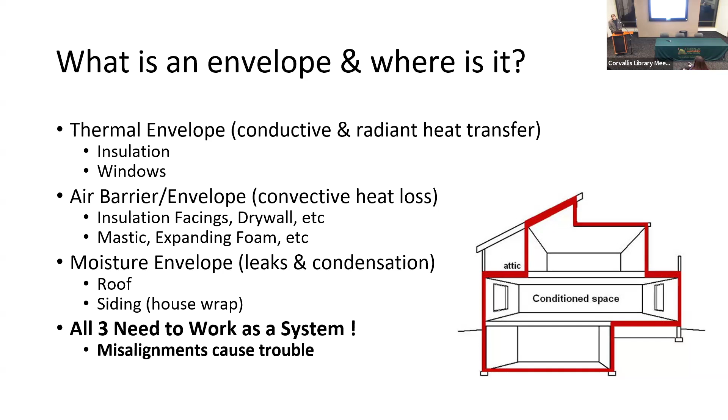Okay, so when we're talking about thermal envelope, we've got attic insulation, wall insulation, underfloor insulation, you've got your windows, and the one that people tend to forget about, your duct system. Your heat ducts are this little extension of your thermal envelope that goes in unpleasant places usually, and has particularly high susceptibility to have problems.

When we're looking at what's good and what's bad, key things you want to think about are what the R value is. This is really what kind of material do you have to separate you from the outside and how thick is it? That'll tell you its thermal conductivity to separate the heat inside from the outside. But you also have to think about, is it aligned with your air barrier? We can talk more about that.

If you walk around with a loose knit wool sweater and it's windy outside, it doesn't really matter what the R value is because the wind blows right through it. And your house is just the same. So you need to make sure you've got an air barrier, which is basically a windbreaker, and some insulation, like a sweater. And then you've got to think about bypasses. These are just the places that get missed, the holes. They're all over your house. Go with a nice barrier, and then don't get overrun by all sorts of crazy things that plumbers and electricians do.

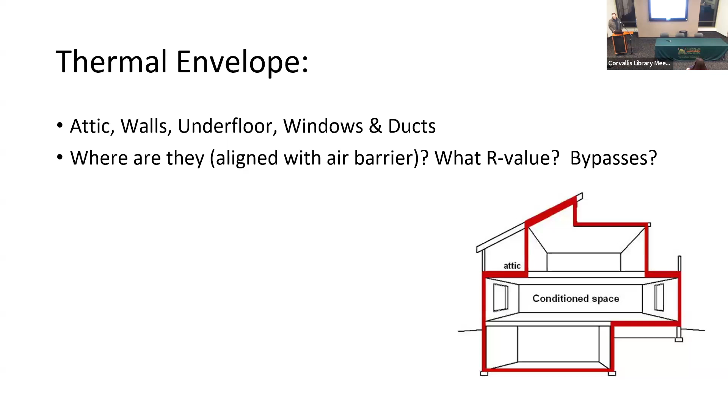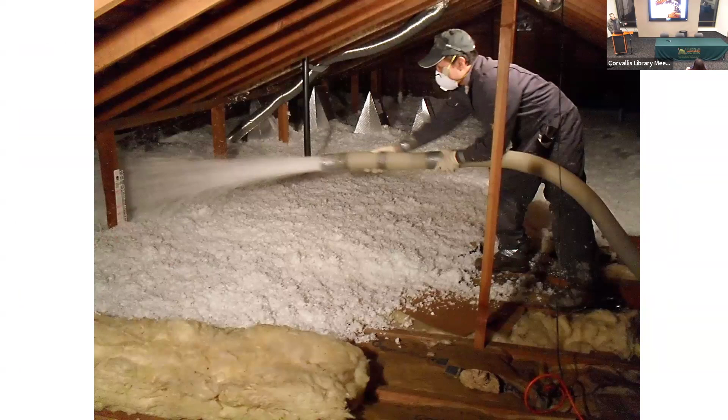Solution: blow in a bunch more insulation. It's not actually that simple. There's a bunch of prep work that needs to be done first. But when we're thinking about the thermal envelope, really, we're just trying to get lots of insulation and get it really thick. So when it's all said and done, it should look something like this.

Okay, then you've got wall insulation. If your house is built before the mid-70s, there's a reasonable chance that you don't have any. And if you do, it's probably pretty lousy, especially in Corvallis. Corvallis was one of the last places in the country to get wall insulation and one of the most resistant. There was apparently some very influential professor nearby who was sure that wall insulation would rot your house out. Turns out he was wrong. So wall insulation is a very nice thing to do.

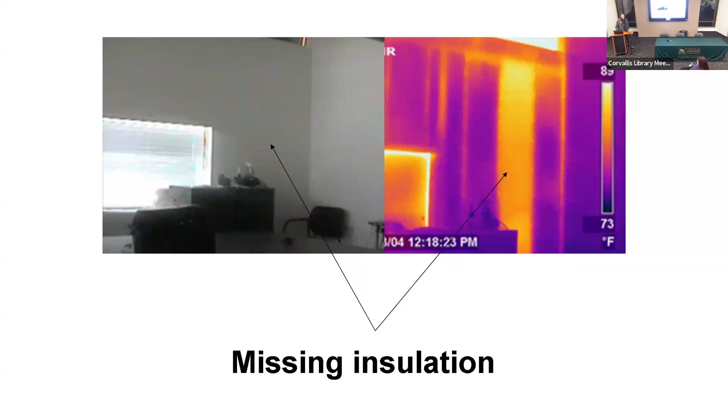Yeah. So the library does have the infrared camera that you can borrow. And so I brought one home and I found out on the top rim up there, that was before they put the insulation on the top plate, and you can see the color difference all the way around. It's pretty cool that they'll loan you an infrared camera. Prices have come down, but the first one that our company bought was $50,000. So, I doubt it's that level of quality. Yeah, well, it was a while ago and it wasn't that great of a camera. They just used to be really expensive.

Yeah, we've also heard you can get attachments for your smartphone that are like a lens. Yes, I have seen those and they are surprisingly decent. They're not fantastic, but they're not bad. You know, if you're interested, those exist.

Okay, if you have no wall insulation or if you have particularly lousy wall insulation, there are things you can do about it. This is the easy way. We pop off some of the siding, drill a hole through the subsiding, pack it full of dry fiberglass, and you'll end up with better insulation than most new homes.

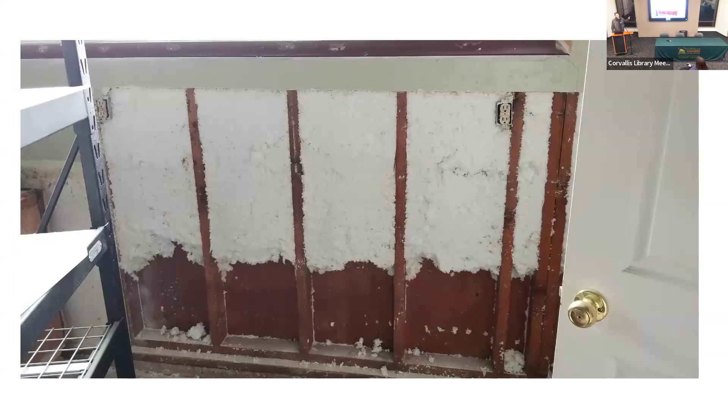So does it settle down over time? Not if you do it right. You want to see a picture of that? Okay, that is a house that we had insulated probably 20 years ago. They had a flood, like a washer flood. So the disaster restoration guys came in. You can see right here, they cut the bottom 4 feet of the sheetrock off. They dug the wet insulation out of the bottom. This is dense packed blown fiberglass.

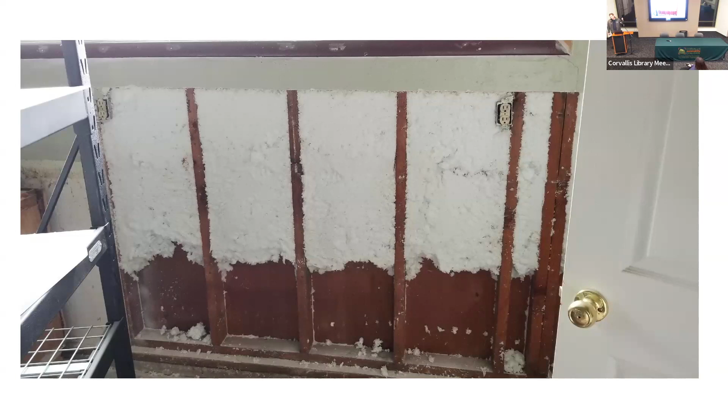There's nothing holding that in. There's no binder, there's nothing. It's just packed so tightly that it stays put. I had a similar thing on my own house. When I moved in, Total Comfort had insulated the walls maybe 5 or 6 years before. I had hideous paneling in my dining room. I took it off, and because I work all the time, it took me about 2 weeks to get sheetrock back up. At that point, I had 2 dogs and a toddler. The insulation was just fine. It packs in very, very tightly.

Actually, when we fill the walls, they usually start at the top and fill down to the bottom, because it'll pack so tightly to the sides that it'll stay put. All that fiberglass is just like little springs that interlock with each other, and they'll get enough tension on the side that it won't go anywhere. But you can dig it out or push through it if you need to, like these guys did. So what's too tight? Because if you pack insulation together too tightly, then it doesn't have the air spaces in between. Very true. Very unlikely to ever get to that point on wall insulation, because the sheetrock or plaster will blow off your walls first.

But that is part of the reason why you do not want to do your own wall insulation. A lot of this stuff is potentially DIY-able. Wall insulation or wall injection is absolutely not. This is a very specific skill set that takes forever to learn. So if you had the insulation blown into your walls more than 25 years ago, would that settle? Depends on what was blown in and how good of a job they did. If it was cellulose, probably. If it was urea formaldehyde foam, probably. If it was fiberglass and they did a good job, should be just fine. If it was quite a few of the different varieties of foam, should be just fine. The only real way to know is either open up some holes or use the infrared camera. Even if it settled some, it's probably not super cost effective to do much about it now, unless you really care. I guess check out the infrared camera from the library.

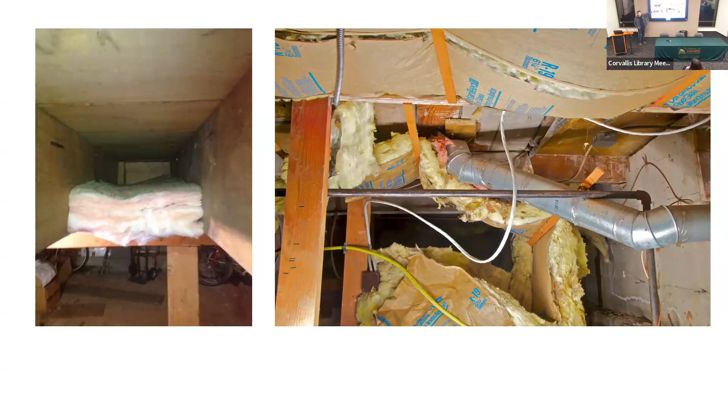Or like this. Here's a great one. Anybody see the problem with this particular install? A little extra airflow in there. A little extra airflow. This is super common. If you have a house built in the early 2000s, chances are your underfloor looks just like this, where the insulation is sitting down, not in contact with the floor. It's doing something, but it's like walking around with your jacket open on a cold day. The air blows right through it. It doesn't do much. You can also have cool stuff like this. All sorts of problems here. Number one, the insulation's in backwards. That paper facing needs to be on the warm side, otherwise you risk condensation. It's falling down all over the place, and I guess they just skipped stuff over there anyway. There's a lot of stuff like that.

This is kind of what you want. So this is an in-progress shot. You want the insulation to be firm, no gaps, kind of like zipping your jacket up. You want it to be even on the bottom and all nice and twined and look pretty. One of the nice things about insulation is if it looks nice and pretty and boring, it's probably doing a good job.

Okay, don't forget about windows. If you have aluminum windows, people make pots and pans out of aluminum because it is so good at moving heat in them. You don't want heat moving through your windows. So please, if you have aluminum ones, let's talk about getting rid of them.

If you have old wood ones, it might be hit or miss, but it is amazing what new windows can do. Square footage wise, most people just don't have a whole lot of square footage of windows in the shell of their house. So it's hard to make huge improvements. But on a per square foot basis, windows are usually terrible and there's lots of room for improvement.

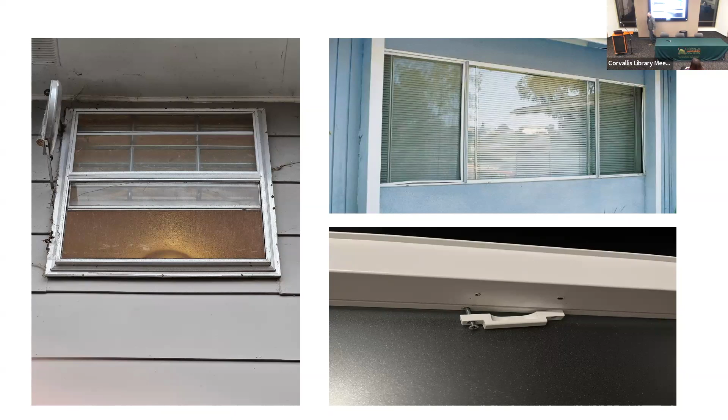Also, if you have stuff like this, so this is a vinyl window. It doesn't close anymore. These people had left their window open for like 10 years because they couldn't close it. That's the kind of stuff that would be really nice to fix if we can.

We could talk about this slide for a very long time, but it looks kind of boring. These are National Fenestration Rating Council stickers. Sounds pretty exciting. Every window that you buy is going to have one of these stickers on it. This will tell you how energy efficient the window is. So the super short version, this number right here that says U factor or U value, that is the same thing as an R value for insulation, but it's inverted because it's cooler that way.

If you want to talk about the math side of that at some point, let's talk later, but smaller U values are better. So the smaller the number, the better. Current code is a 0.27, this is 0.24, so it's a fair bit better than code. Solar heat gain coefficient, this is a super interesting number. This is how much radiant heat moves through. So when the sun is hitting your house, how much that greenhouse factor comes through.

There is not a right or wrong about whether this is a big number or a small number. It's all about what you want. Some people want to have a greenhouse. Some people think they live in Arizona and they want to reflect all the heat out. You can pick what number you want, but probably the biggest advancement in glass for windows for the last maybe 10 years is that it is now reasonably affordable to pick the solar heat gain coefficient you want. It's not just a standard number anymore. So there are lots of flavors of what's called low E that you can choose from.

Yeah. So one thing I learned about the R values, some of the windows, they say 60. That R value isn't 60, it's actually, on double glazed, like 0.6. Isn't that right? Yes, so an R value is the inverse of a U value. So in R values, which is what we usually talk about for fiberglass insulation, they're relatively big numbers and the bigger the better. So current codes are 49 for your attic, 30 under your floor.

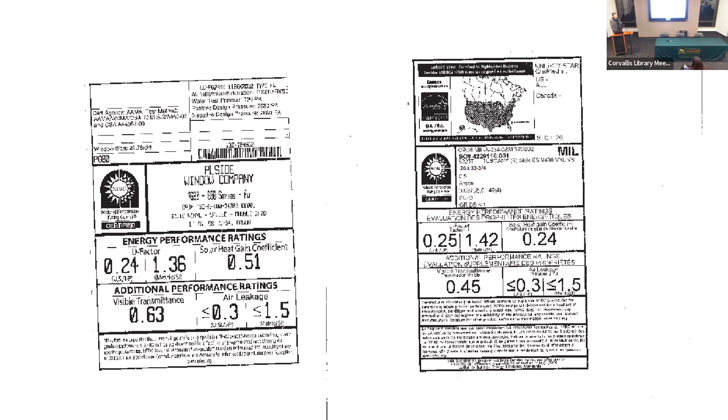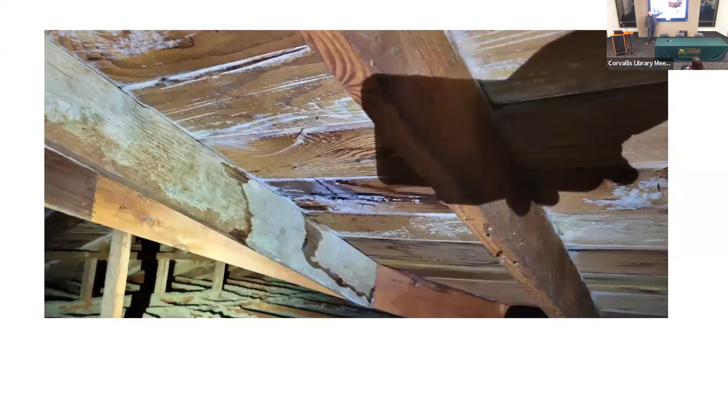Okay, water barrier, super quick version on this: this is the underside of an attic. This is water pouring in. This is mold and fungus and stuff growing. If your roof leaks, it's a problem. You don't need me to tell you this stuff. But if your roof is leaking, please fix it before you do anything else.

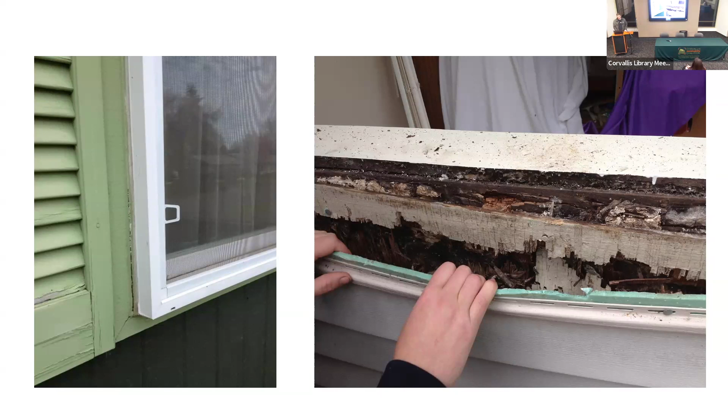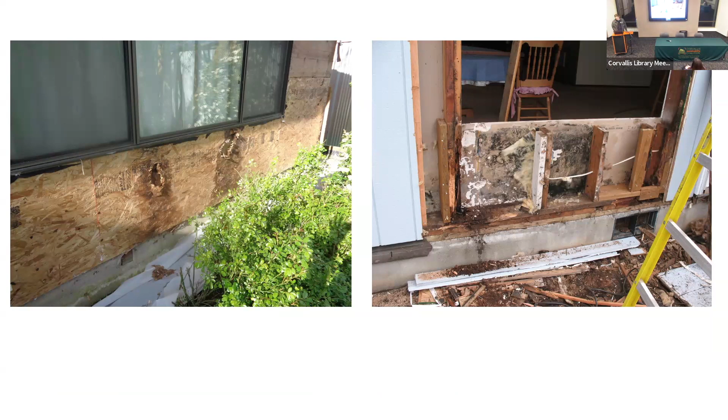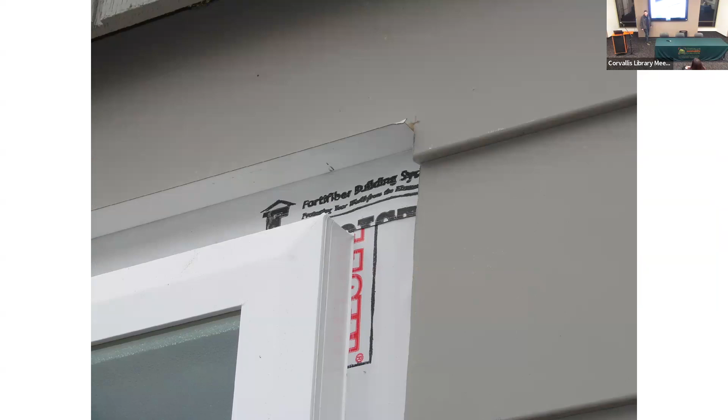Water barriers are important. Otherwise you get stuff that looks like this. So this isn't too bad, but this is all rot. That's rotten fungus and mold and all sorts of gross things that happen from not doing things carefully. The answer to most of the problems, by the way, is this little piece of metal right here that probably cost $2. That's window flashing. It solves a world of problems. So we can talk about all that in quite a bit more detail, but it is very important to keep the water out of your house.

Okay, then you got to think about air movement. So the simple way we did that, we bought a dehumidifier for $125, and it's taken maybe a half a gallon a day of moisture out of the house. We just move it from room to room. It's always picking up moisture, and so anyway, that's a simple thing to do. Yes, dehumidifiers can be extremely helpful. There are plenty of other ways to deal with moisture issues, but that one is pretty much a surefire.

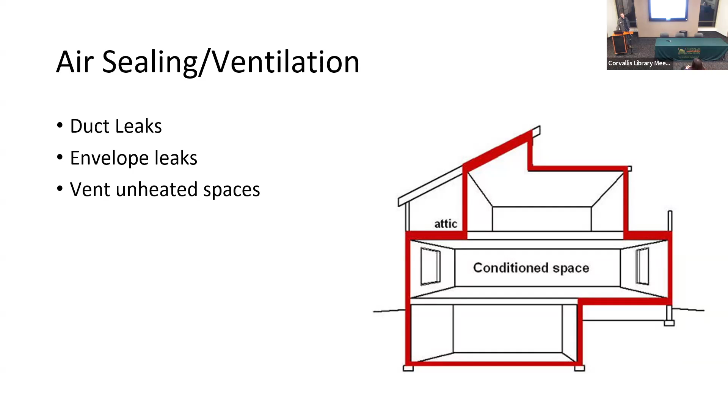Okay, so the other envelope thing that we want to talk about really quickly is the air barrier. Getting back to ducts, this is the one that people tend to forget about. Who wants to tell me why you think that air leaks in your ducts are the most important thing out there? Anybody? Somebody. Somebody else, I mean, go for it, but somebody else got to talk. Can't just do this guy.

Well, the one thing we found out, we were running the heating till we opened up the manhole, and we found out the temperature underneath the house was the same as the temperature inside the house. That is super common. In fact, people's crawl spaces are hotter than the inside of their house when they have duct leaks. Because you're heating the outside. Yeah, if you have a leak in your duct, it's outside your barrier, you're heating the outside. You're not heating or cooling the inside of your house.

Exactly. And your ducts are pressurized. Air doesn't move through a hole if there's no pressure difference. But the whole point of a duct system is to have high pressure differences. It's also usually the hottest air in your house. And so if it blows out on your floor or in your attic, it's just not cool. So people do all sorts of things, super awesome duct repairs like this, leaving giant 1-inch gaps down the length of the duct.

If your house is built after like the mid-80s, you probably don't have metal ductwork. You probably have flexible ductwork, which is made out of like party balloon mylar and garbage bag plastic, and for most people, taped together with some sort of random duct tape-ish stuff. And so things like this happen. You're talking about your house, the same temperature inside and outside. This house, which had this really nice tall crawl space, I think it was 98 degrees in the crawl space. They were heating that and waiting for that heat to radiate up into their house.

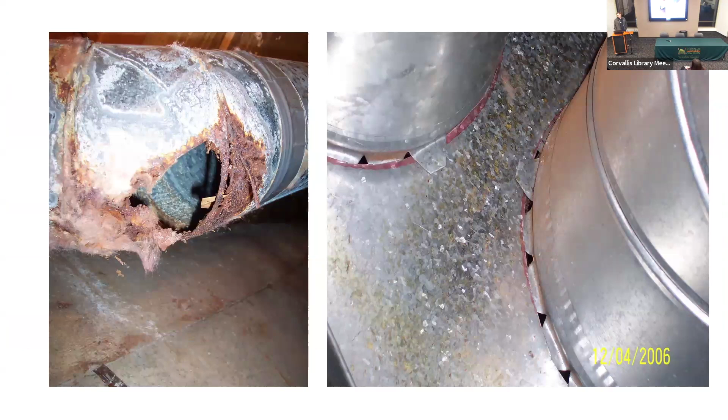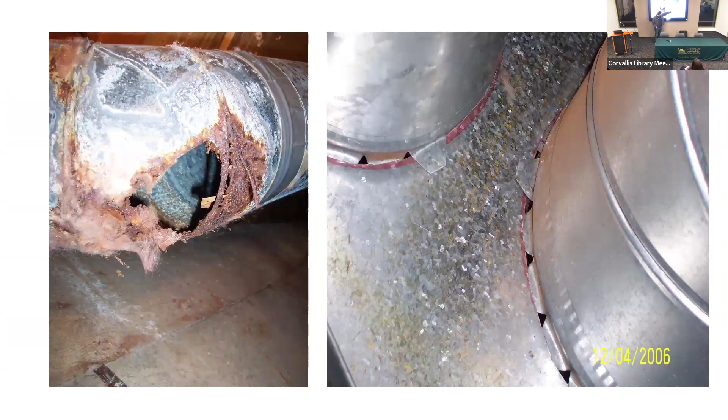We also get all sorts of cool stuff like this, especially if you live downtown Corvallis and you have intermittent flooding. Back in the day, nobody realized apparently that keeping the ducts more than like an inch off the mud was a good idea. And so you get a lot of rusted corners and elbows and stuff. Even in new stuff. So this was like brand new. Nobody ever got around to sealing all these. Just places where things can leak.

Other cool things. If you have a leaky duct, wrapping it in insulation does not actually help very much, other than it'll tell us where it's leaking, because that fiberglass over time will act like an air filter and it will get dirty. And you can look at the dirty spots and that's where it's leaking.

So you see this kind of nice pink insulation here, and then you look at the bottom of it and it looks filthy dirty. This is somebody's cold air return. They've been sucking air from their garage in through their fiberglass air filter into the furnace for 20 years or something. Good stuff to look for.

Other cool things, flex duct does not last forever. When you buy a box of flex duct, especially back in the day, a lot of times they tell you it has like a 35-year life expectancy. Some of this stuff has been around for 55 years plus now. A lot of it's turning to dust on the inside. You ever notice pieces of fiberglass coming out of your duct system? Probably your duct's disintegrating.

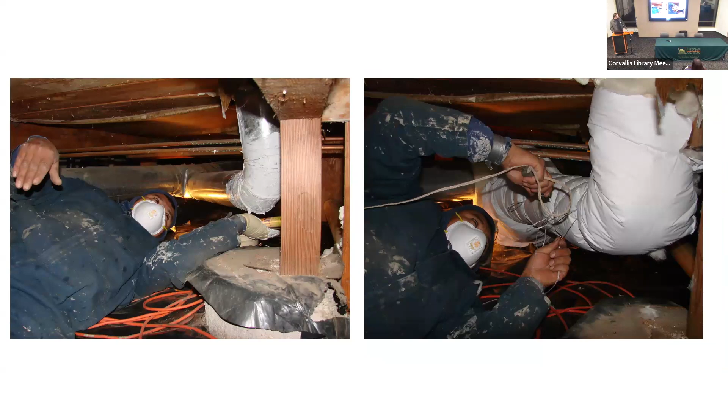There are fixes for these things. We can seal them up. So if you have metal ducts, you just screw the joints together, which is again something that people didn't really think about in the 60s or the 70s or the 80s or the 90s, 2000s. And then take mastic paste, goop them all up.

So it's this bucket of semi-hard rubbery goo, slather it all over the outside. It's kind of like putting a cast on the ducts, and it'll stop the air from blowing out, and then get them all insulated so they look like that. And if you're going to insulate it, make sure it stays on by tying it on with twine.

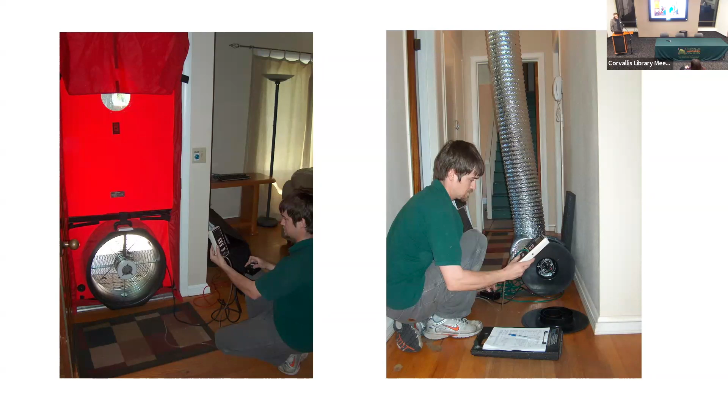Somebody had asked me about blower door testing earlier. Yeah. So if you want to be super cool, we can pressure test all this stuff and find out how airtight your duct system is, how airtight the shell of your house is, and start tracking down where leaks are. It's really fun. It's about the only thing that we really encourage homeowner participation for. If you ever want to do this, it's a fun day. I don't suggest you do it when it's 28 or 29 degrees outside though, because it sucks lots of cold air in your house, as people this week have found out.

Okay, who wants to tell me where the worst drafts in your house are? Anybody? Our engineer friend? Over the stove, from the top of the vent hood. Definitely could be if it's missing a backdraft damper. Anybody else? Front door. Front door, super common answer. I would be willing to bet unless you have had blower door testing and air sealing done, you are both absolutely dead wrong, and that it's underneath your floor.

Plumbers used to carry chainsaws to cut holes for pipes. Nobody's ever sealed these things unless it was us or a couple other people around. You get a lot of stuff like this. So somebody wanted to bring one little low voltage wire here. Well, they drilled 3 holes for it. Air just drafts up through that stuff.

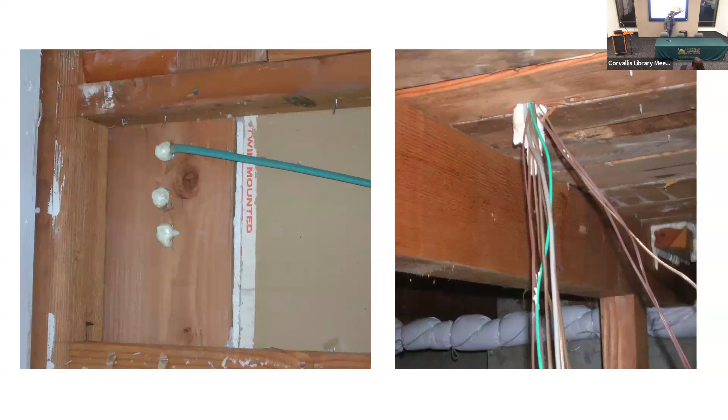Here's another one. At least they brought a bunch of wires through their hole, but until they got foamed, the air and the mice and the spiders and whatever were all just crawling right up there. I don't know exactly what they were doing here, but our guys spray foamed this because apparently there's air drafting around that as well. There are just holes everywhere.

Recessed lights are another big one. Luckily now we have integrated LED trim, so there's some really easy fixes for these. But older recessed can lights, if you look at them, had holes manufactured in the top of them. They draft air like mad.

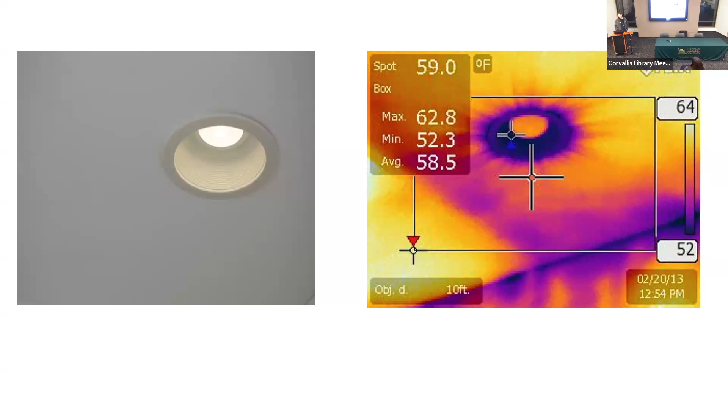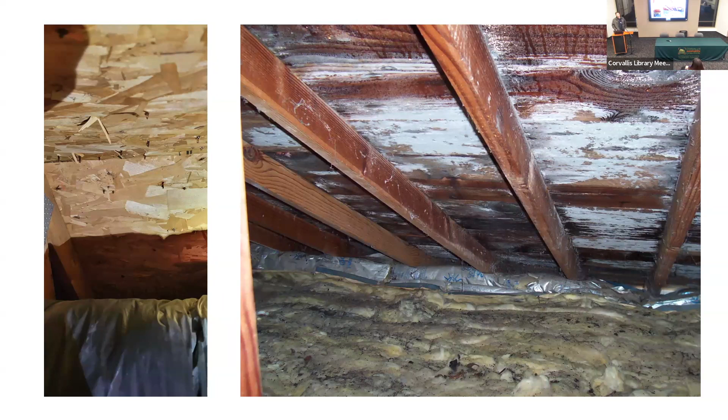Okay, so we talked about where you want to keep air in. There's another place where you want to make sure you have lots and lots of ventilation, which is the space between the thermal envelope and the moisture barrier of your house, which for most people is your attic and your crawl space. There's some other interesting situations out there. But when you don't get enough airflow, you get stuff like this.

I don't know if you can see the nails here. They look really dark brown. It's because they're all covered in rust. And if you look carefully at the picture, you'll see a little water droplet on every single nail there. When stuff in your attic hits the dew point, it will sweat, it will condense, and it will rain inside your attic no matter what's going on outside your attic.

And if that happens for very long, you end up with cool stuff like this. So this is like 3/8 of an inch thick fungus growth on the underside of somebody's roof, and mold and mildew and all sorts of nasty stuff. This week, I have probably been in 6 attics, and I would say that all of them have had fungal growth and mold and mildew. Most of them are pretty bad.

This is what happens when you don't ventilate well, or at least you don't think about where your various envelopes are. What can you do to kill that? To kill it? Yeah, to kill it. You hire a mold remediator, and they come spray it. They usually have 2 things. So there's the stuff that kills botanicals, so it kills the stuff, and then they come through with a bleaching agent that makes it look better.

One of the big causes is stuff like this. This is a kitchen fan or a kitchen fan duct. So somebody's down below, they're boiling a pot of water or something. It's taking all that steam and it's blowing it right up at the underside of your roof. This is super, super, super common. If your house was built before about 10 years ago and nobody's looked at this, this is probably what it looks like. This one I think is a bath fan.

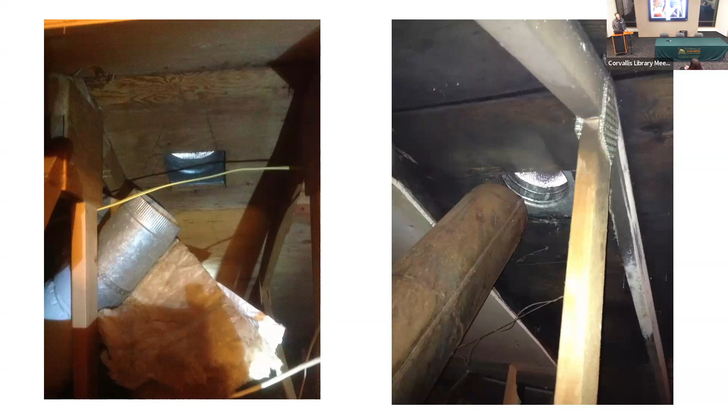One of the answers is to ventilate. You would think that most roofers would actually check code for ventilation. If you look at most roofing contracts, it will tell you that ventilation is to be replaced as is. So you need to be checking these things. So you want to have intake vents at the bottom. You want to have exhaust vents at the top. There is a code for this. We can talk about it if anybody really wants to. But adequate ventilation is important. Most people don't have enough.

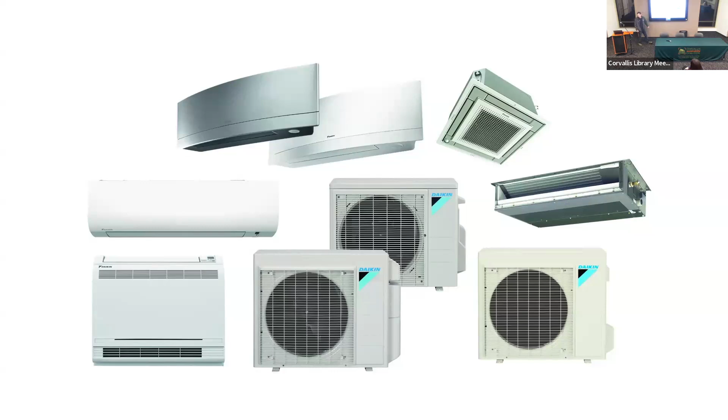And then really quickly, I wanted to talk about HVAC stuff a little bit. The short answer is get a heat pump. There are all sorts of heat pumps. You want it to be inverter driven. The size and shape, well, can't say it doesn't matter, but there are a lot of options. You can have high wall ones like this, which is what everybody thinks of for mini splits. You can have low wall ones, concealed ones, mini ducted ones, full size furnace ones that look like this.

These are all the same guts as a mini split, but it goes in a duct system. That's kind of what they look like when they're installed.

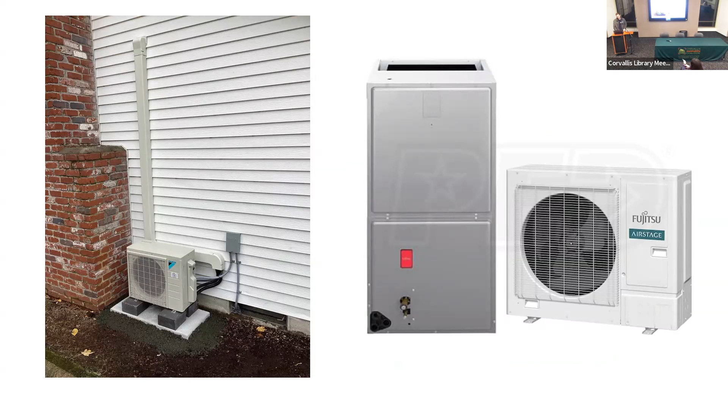I've been talking for a long time. I think I'm way over, but if you ever want to talk about that stuff, there's a lot we could go over. Okay. I'll have questions after. Oh, okay. Yeah. Questions after. All right, thank you.

I have to say, those photos were highly motivating. I live in a historic home that was built in 1913. And I'm glad this is being recorded because I want to show those photos to my husband and say, we've had insulation put in, but I have a feeling we've got a lot of other things we need to look at. So thank you for those photos. They kind of are a little scary, but sometimes you get motivated by things that are scary.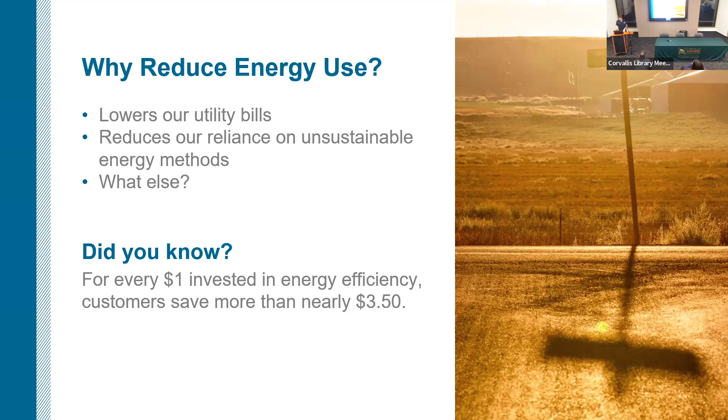Did you know for every dollar invested in energy efficiency, on average, customers save nearly $3.50? Yeah, that's a concept. All of a sudden, we're looking at not only increasing comfort, safety, all these things, but your return on investment is often significant, okay? I think y'all understand that. That's why you're here, right? Awesome. Cool. Well, that's who we are and why we do what we do.

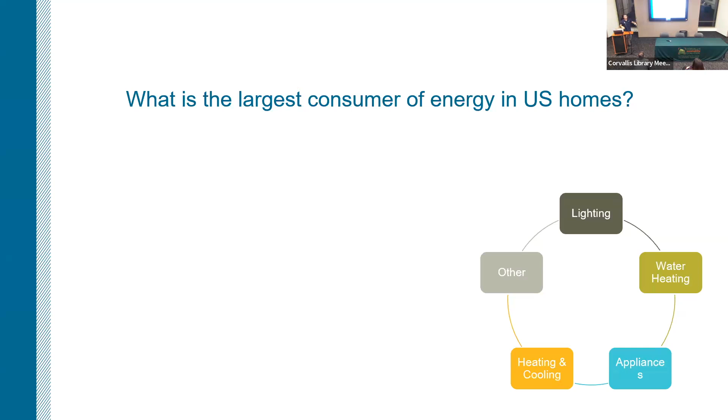Now for home energy use. We're gonna talk about key users in your home. So what do you think? What is the largest consumer of energy in US homes? Any guesses? Actually, let's do this. You've got the list there. Turn to a neighbor. I'll give you about 45 seconds. Talk with a neighbor. Those four main categories, don't count other. What uses the most energy?

Am I heating and cooling? My timer's not working. Yeah, go for it. I was wondering what the 45 was. Yeah, well, it was a timer at one point. Your visuals were immensely helpful. And it's so true. Exhaust vents are connected, lots of air, lots of gas. Give me 5 more seconds here. So many photos of just somebody went to Home Depot and bought some batts and threw them in their attic and called it a day. And I'm like, okay, wow, that's great.

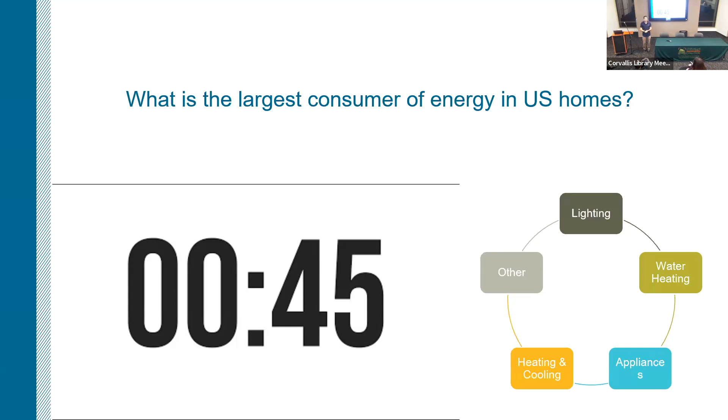All right. What do we think of these 4 categories? Any guesses? Cooling? Anybody else? Oh, wow, we're all just top A students here. Yeah, so these numbers are from a couple years ago, so they could be a little bit different now, but on average, the 4 main categories of energy users go in this order. Lighting uses on average 12% of the energy in the home. Water heaters, 20%.

Appliances, 23% of energy, and then the majority is in heating and cooling at 41%. However, for folks that I was mentioning earlier, like folks that are spending $900, $1,300 on their energy bills, that number for heating and cooling is probably closer to 80% or 90% of their energy use. Why? Because the problems that Jeremy was talking about are what spike your energy use significantly.

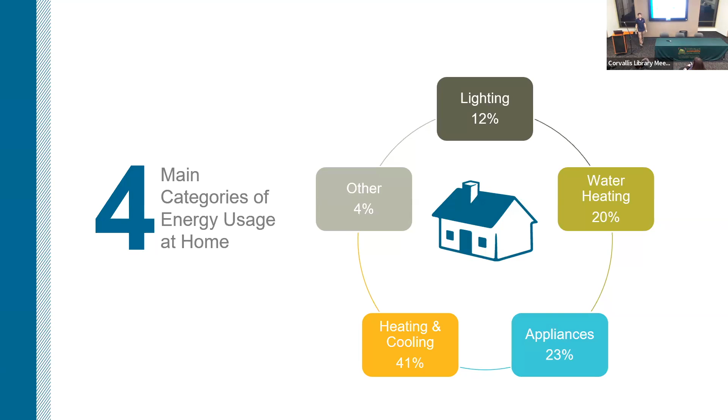So given that, then let's talk about this question: home upgrades, priority energy upgrades in your home and available savings. So given that most of the problems are here, what do you think are going to be the home upgrades that are the most likely to save you energy or help you reduce your energy use? Insulation. Insulation, air sealing? Leaky windows? Window, so fixing windows or replacing windows? Yeah, replacing. Replacing windows.

Heat pumps. Yeah, efficient HVAC systems, upgrading your HVAC systems is something that's efficient, whether that's a high efficiency gas furnace or a heat pump, like Jeremy was saying. Yeah, significant, very important if it's an outdated system or if it's an old electric forced air furnace or electric resistance heat. Very important to upgrade that.

Yeah, absolutely. Actually, let's talk about resistance heat just for a moment. Jeremy's mentioned it. And for those of you like me who didn't come in to this field knowing a lot, I do now. Well, I know some.

Resistance heat means, think high resistance metals like a toaster, right? You turn the toaster on, all of a sudden a bunch of electricity is going through those metals that are very high resistance, increasing the temperature significantly and also making them shine, right? It's very bright. You look at a toaster. And then you put a fan in front of it, and that's your heating source.

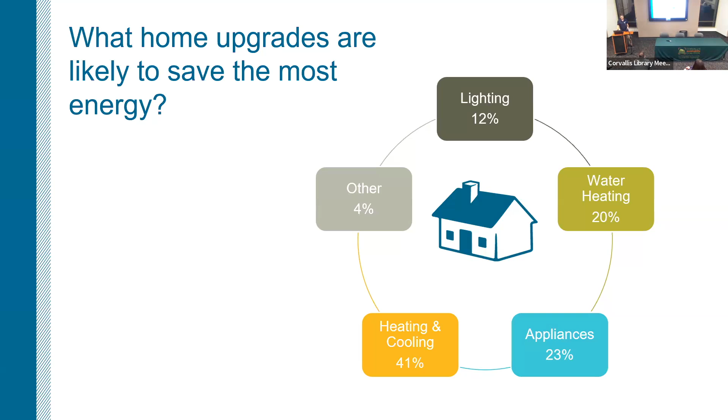If you switch to a heat pump, you're using electricity and pressurization and some fans to separate hot from cold air. And probably you're getting a 4 to 6 times increase in your energy efficiency. In other words, using 4 to 6 times less electricity to then heat your home or cool your home with the heat pump as compared to resistance heat. Does that make sense? Okay, you can ask me afterwards too. But yeah, that's the difference between heat pumps and electric resistance heat that Jeremy was talking about.

Great. I did that. Cool.

Now, biggest impact. Okay, so we mentioned all these things. We got insulation, air sealing. We didn't talk about water heaters. But then we mentioned upgrading your HVAC systems, also upgrading your water heaters. If you've got an old outdated water heater, that unit in and of itself is using approximately 20% of your home's energy use. So upgrading, if it needs upgraded, is a really important step. If it's using electric resistance heat, switching it out with something that's not using electric resistance heat is also a really important step. Like a heat pump water heater, for example.

One of the challenges in energy efficiency conversations is that, as a society, often we've come around this concept that, I've got drafts in my home, or my energy bill is really high, so I should replace my windows. And that's not a bad thought, but like Jeremy was saying, this window is a hole in your wall, and it's a hole in your wall whether or not you replace it. So if I decide this window's bad, and maybe the U value is like 3.1, really bad.

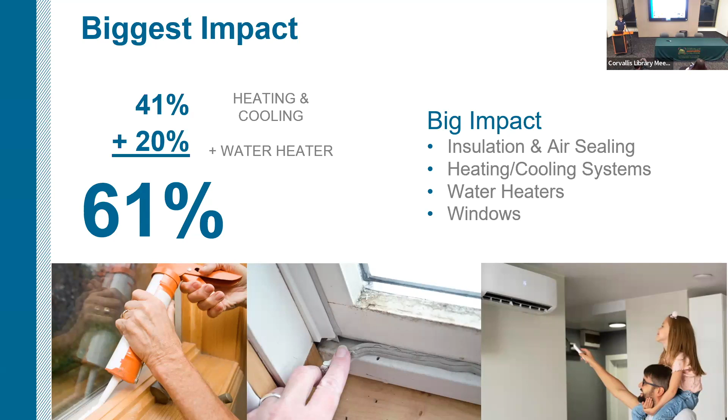Yeah, cool. Awesome. Thanks for chiming in there. Feel free. Awesome. All right.

You could call the contractor and say, hey, I think my attic insulation is bad, could you come look at it? And they could come out and tell you, oh yeah, it's really bad. It's a couple inches. You would qualify for an Energy Trust incentive. So, Jeremy, help me out. If the total job is like $6,000, you might get an Energy Trust incentive for how much?

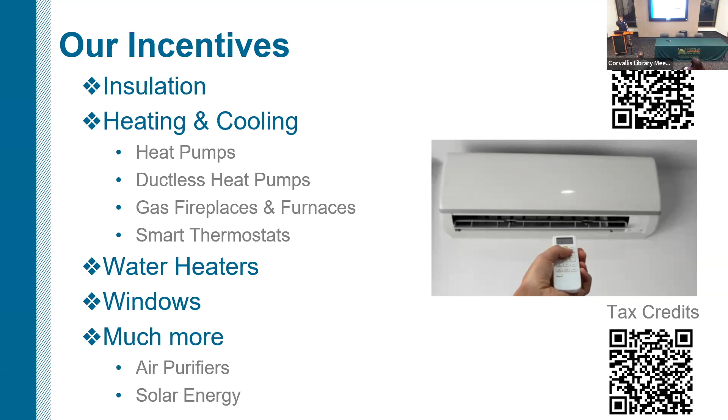Also on that website is an online home energy assessment. See if I have that here. Yeah, an online home energy assessment. You can scan this QR code. That will kind of lead you through what to look for in your house and then what the incentives could be.

Cool, cool, cool. Are you not gonna talk about smart thermostats? You can ask me afterwards. Yeah, I want to respect our time here. Thank you. Okay, all right. I hope we have time for questions. Yeah, we're good. Our last speaker is Christy Urban from Seeds for the Sol. I don't think this is working. That's not even on, so why am I doing it? It's okay, we'll project. Okay, all right, Christy, thank you.

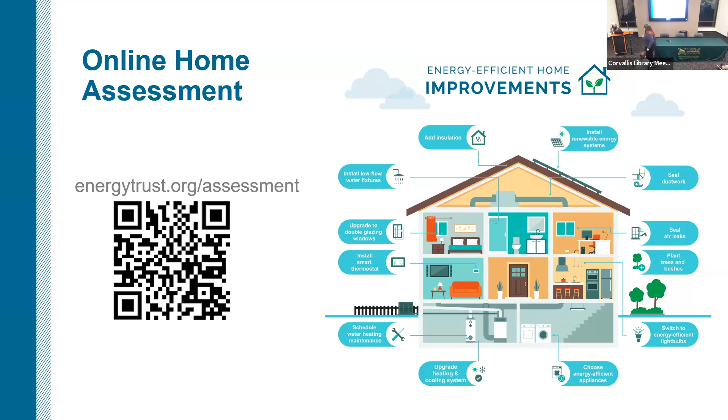And let's go to your slides here. Perfect, thank you. All right, well, if you've heard all of this information from Jeremy and you're starting to question some areas in your home that might need upgrades, and you hear from Taylor that there's money available to do it, and it all feels like a lot, come talk to Seeds for the Sol. We are a free service here in Corvallis and all through the Mid and South Willamette Valley. And what we do is we help navigate this process. So I'll give a little bit of context of how we do this.

So our program, we have something called the Rapid Revolve Fund. What this fund is, we pull in funds, whether that is from donations or community members loaning to our program. So let's say you have a huge, amazing savings account and it's just sitting there, not doing a whole lot. You can park some of your savings into our account. And what we do is we pay for these upgrades for low-income households. We help them navigate this incentive process with Energy Trust.

We pay the contractor so that the contractor is not waiting for that funding to come back from Energy Trust. It takes some time. We go through that process, we get reimbursed, and then when you want your money back, we send it back over to you. So recycle and reinvest. All of this funding, once we've identified an upgrade and an applicable incentive, it's all pre-approved. It's all a guaranteed process that this money just runs its cycle and comes back right where it started.